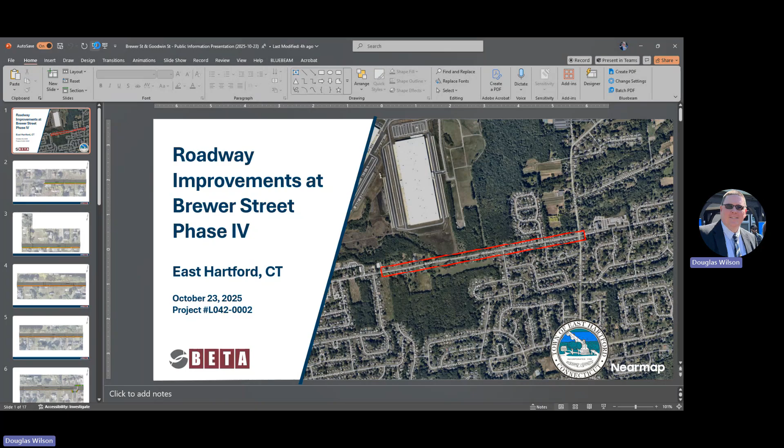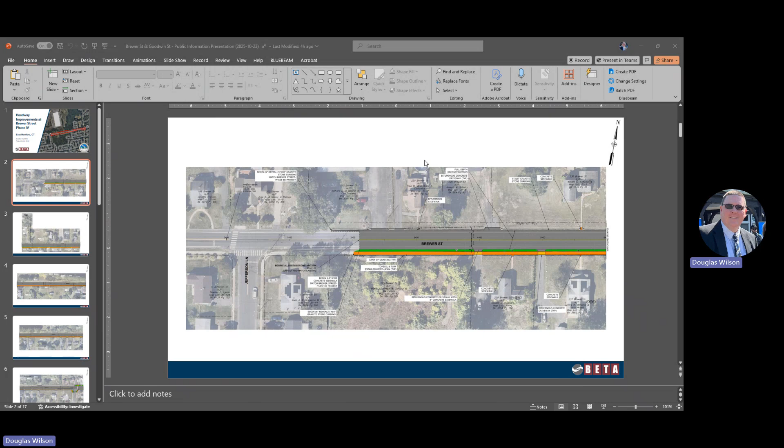This way. Let him. You just tell me when you want me to advance here. I'm sharing. See where it says stop sharing? Yeah, I must have the wrong window. Hang on, try it again. You just come over. I gotta share it as a meeting. I just have to minimize your team's talk. Okay, try that. One, I'm just gonna get here no matter what. That's cool. All right, sorry about that. There we go.

Okay, all right, perfect. All right, so how we're going to do this is that we're going to go through each project one at a time. We're going to start with the improvements on Brewer Street Phase 4. We'll take a break or a pause right after this just to answer questions and comments from everybody. Once we get through Brewer Street, then we're going to the following project, which is Goodwin Street.

So this presentation is slightly different than the material that you might have seen online. The plans that were uploaded online, those were design plans. They're not meant for a meeting like this. So what we had done for this is that we have added aerial images as well as colorizations to the maps to make it a little bit easier to read, just to follow along as I go through the project.

So again, we're going to start with Brewer Street Phase 4. Doug had already alluded to where the project is. This is Phase 4. This is the last phase of a 4-phase project. So again, this is from Jefferson Lane all the way to Forbes Street. It's roughly 4,300 linear feet.

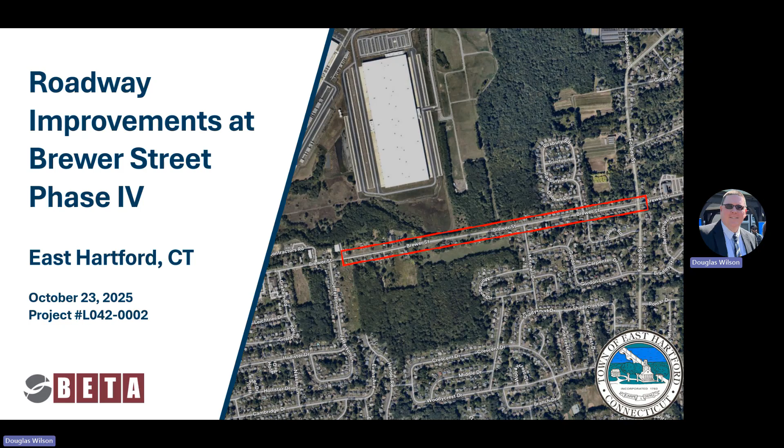So from here, what I'm going to do is show a blow up of several sections of Brewer Street, talk about some of those components in a little bit further detail. And then we can save the questions to the end, and I can always go back to a particular property or a plan for some additional questions. So starting out on Jefferson Lane.

So where we're showing the dark shaded line, that is pretty much where phase 3 had ended. It's approximately 150 feet east of Jefferson Lane. It's pretty much the cross section is exactly the same as the other 3 phases. This is, it's a roadway, curb to curb is approximately 30 feet. We have 11-foot travel lanes in each direction with 4-foot shoulders.

The only difference on this is that the curbing, if you go out there today, it's all bituminous curbing. That curbing is going to be changed, so it's going to be actually granite curb from this point all the way down to Forbes Street. And at the beginning of the project, the sidewalk on the south side will be picked up. It's a 5-foot wide concrete sidewalk. Like I said, it's from Jefferson Lane all the way down to Forbes Street.

You'll notice that at each of the properties, we will be reconstructing the driveway aprons, as well as continuing the sidewalk across those driveway aprons. There may be some properties where we might have to reconstruct a little bit of a concrete sidewalk. Maybe it's a pathway up to the front door. Maybe it's a little bit of the back of the aprons on each of the properties, but it's going to be very, very minor.

So onto the next section. This is basically a continuation of what I had just shown you. This is the section, the cross section is pretty similar.

By the way, the roadway, when it's being reconstructed, it's actually a full depth reconstruction. This is not a mill and overlay operation where we're just taking off the HMA. This is a full excavation, all new base material. I believe they're putting back 8 inches of asphalt, so it's a pretty beefy section here.

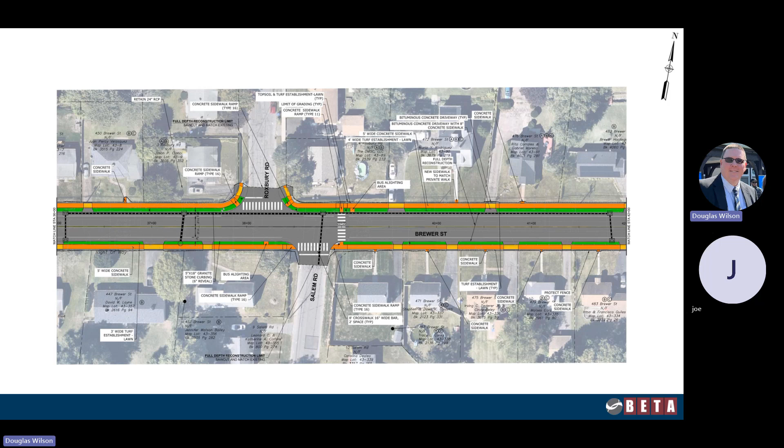Is there any coordination with that project on Handle Road, Jefferson and Brewer, to not do the sidewalk if they're gonna open this up? Is there gonna be a driveway or a street potentially in the next couple of years that wouldn't need a sidewalk in that spot if they open that up to traffic with houses in the back?

The section where the developer is looking at a subdivision for residential housing is this piece right here, to the east of 6 Jefferson and before 229. It's the grassy, shrubby piece, at 215 Brewer Street. So you have Jefferson that comes out, one house, and then the developer's house. Their original ask was to push the road through right there and have two houses away, another road that came out.

One of my roles is legal traffic authority, and I said no, I don't want another road coming out just two houses away. It's too close — so close that when you come out of one, somebody could be coming out of the other and you'd almost be staring at each other. It's almost like they'd need to join into one intersection. So they're not going to do any road connection from that developer's parcel onto Brewer Street.

They're going to do a public sidewalk connection instead. So if you're down in the subdivision, below it, you come up through their road — a public road — and walk up their sidewalk, coming right out onto Brewer Street, onto these sidewalks, and you can go either direction. It makes a sidewalk system without having to go over to Jefferson and come up.

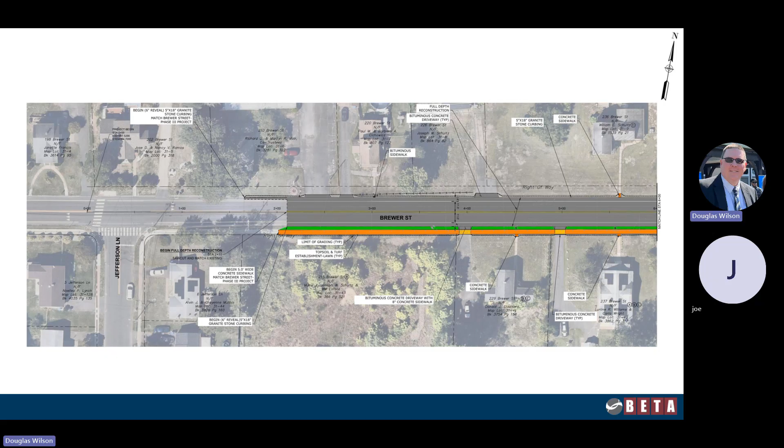It says that you're gonna put bus alighting areas for people at the bus stops. I thought you're gonna put like a pad so that people can be standing on something.

So those are called alighting areas. When we're doing the sidewalk reconstruction with all the new ADA ramps at each intersection, one thing we noticed is that typically at a bus stop you need a way for people in wheelchairs or with other disabilities to board the buses. Right now it's very difficult because you just have a grass strip that separates the sidewalk - that was one thing that did get neglected on the plan.

I don't want that - even if a wheelchair came, they couldn't get up on the curb. Are you saying, to be clear, you have a stop right near you? Yes, and it's on the north side, right next to that right of way that you need.

Part of me is wondering - is it a lot of use on the westbound side, people trying to stand on the side of the road? Then that might be an area where we want to add a crosswalk. We can do a mid-block crosswalk and put a pad there for the bus pickup, so people can stand on that.

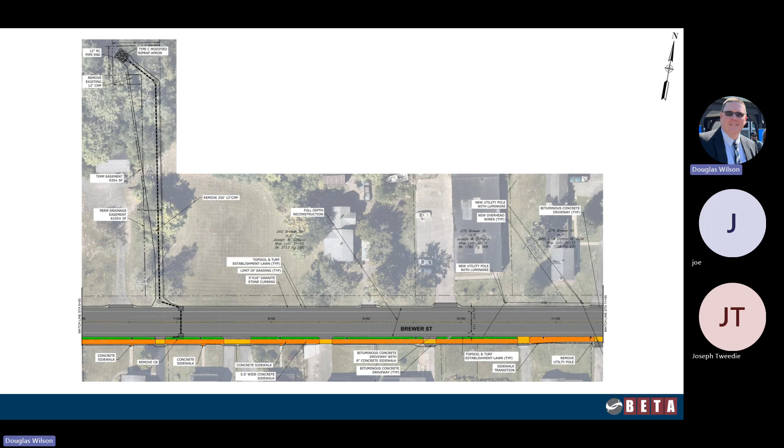Do you want to give any background to this before I start? I'll just say that I know School Street was reconstructed in 2010. This section of Goodwin Street has needed reconstruction for a very long time - it was done in '80. The cross section is just absolutely hammered, in front of my house anyway.

To be honest, what I did when I submitted the application is I put a level on the road and you can see the dips in the road, right from my house. It's really bad.

The design of the street will be with a very heavy base and a very thick pavement that will be able to take the industrial traffic that comes from Leggett Street, from the distributor, and from Sherwin-Williams, right with the Duraplex - that's what it is, just right after the Duraplex, on the main street.

So the brand new section is absolutely mandated here, like trying to mill and pave that road to make it better is not going to do a thing. Because that's only got about 8 inches on it, and with the tractor trailers and stuff, you gotta have a minimum of 12 or better. I think Jason probably knows the exact number, he'll give it to you in a minute.

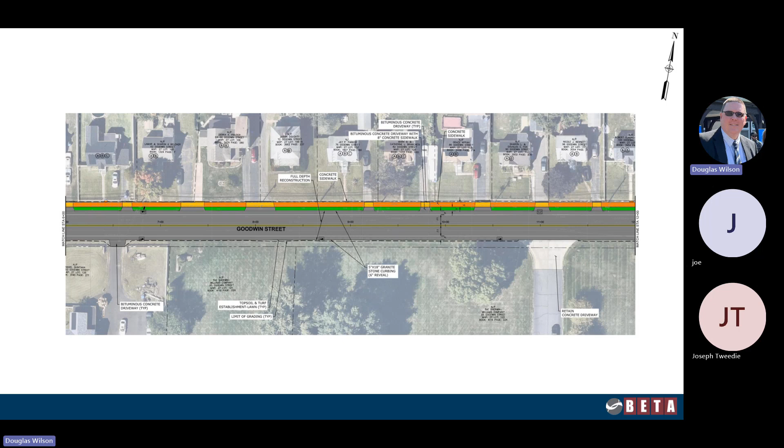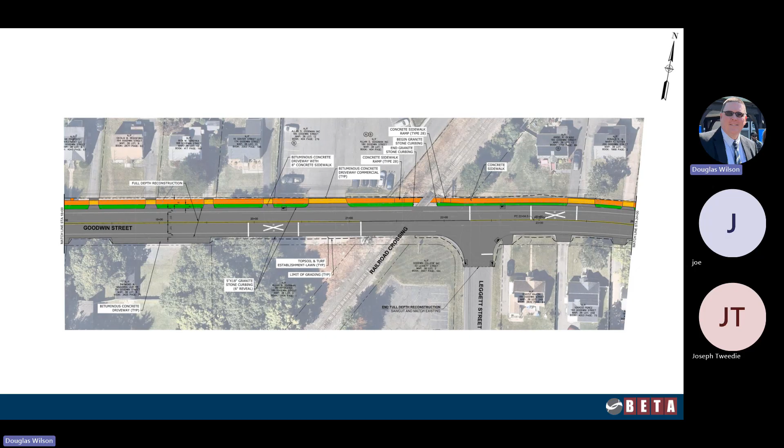All right, what else you got there? I'm gonna skip this, we already talked about this. Let's talk about this—we mentioned the railroad crossing. We mentioned that it was going to be either upgraded or rebuilt as part of a couple of locations, but as part of this project, we are not directly impacting the railroad crossing. So the rubber mats that are out there are not going to be touched—we're going to just basically build right up to that rubber mat.

We will be upgrading the sidewalk ramps on the north side, each side—those will both be ADA compliant. Right now they're not. So it's going to be 5-foot wide sidewalks with ADA compliant ramps. We're going to have appropriate markings and restripe it just as it is today—11-foot travel lanes, 4-foot shoulders, nothing too special here.

And it really doesn't change much from here on out. It's a consistent roadway section, same sidewalk, same grass strip. We do introduce one drainage structure in the middle of the plan just to handle some of the stormwater a little bit better, but other than that, there's not a lot of other drainage improvements.

And we are going to be adding a crosswalk at the condo association—is it Joanne Drive? Yes, we will be putting in a sidewalk ramp with a crosswalk so those folks can cross to the other side of Goodwin Street at that location. And then we pretty much terminate that just short of School Street on the right-hand side, matching the end of the construction that was recently done a couple of years ago.

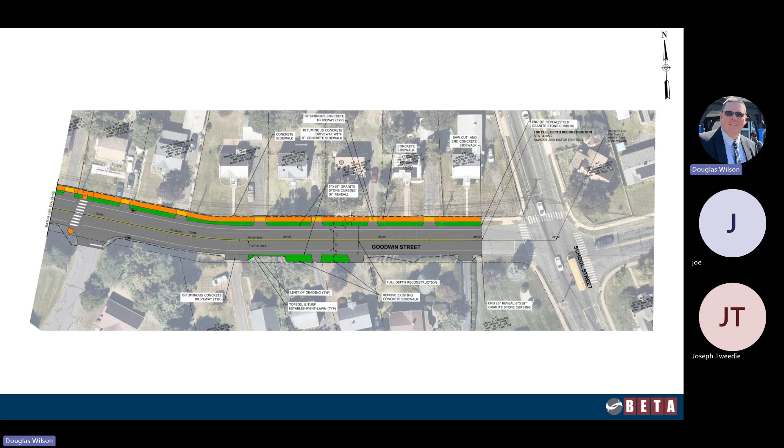I travel down that road all the time, and count me as one of the people that's 100% in favor of the project because I know it's like a war zone. I'm probably one of the guilty ones that's been driving on the left side.

I appreciate everything. My question is, early on, Doug, you had said that the thrust of the project construction is going to be paid for by the state. Correct, except for the Beta Group, which is, we pay for the design up front. Do we know what those cost figures are at this point? For Beta, I don't recall where your contract was.

Because the onus is on the taxpayers for that, right? Correct, yeah, I'd have to look it up, or guesstimate. Yeah, it's in the couple hundred thousand dollar range, something like that. So it's a couple hundred thousand between friends. On a $3.5 million job, it's actually pretty reasonable. Yeah, it's a drop in the bucket.

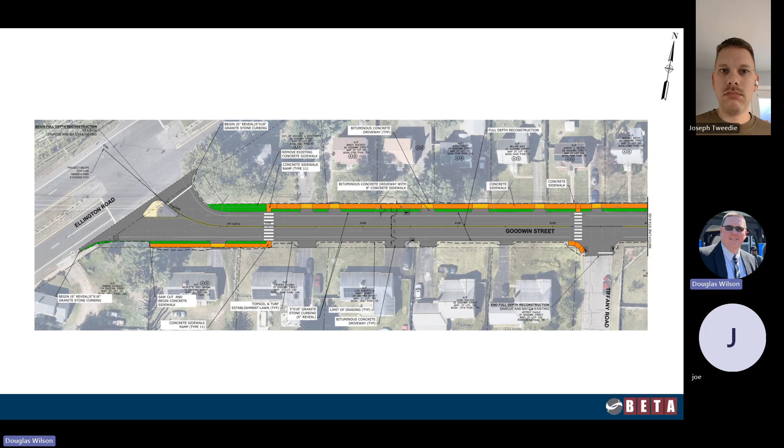So there's that, where the guide rail is on the north. It's past Jefferson, halfway past that corner road where it's all overgrown now. Pratt's supposed to take care of that, but it's all overgrown. There's a metal fence besides it.

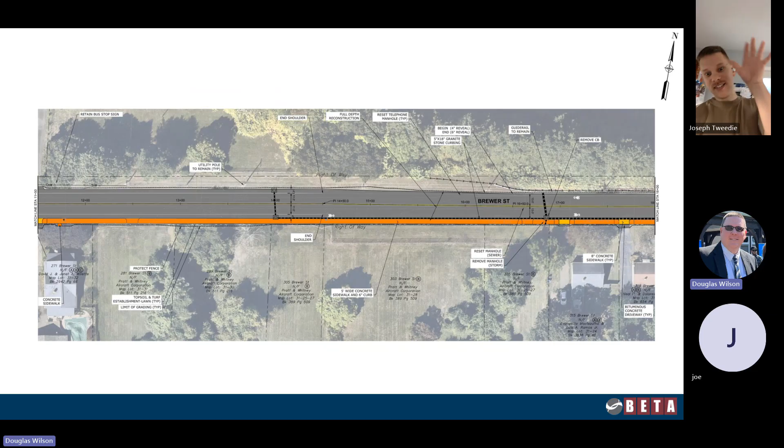So that's the driveway that goes in. Go one sheet west. This is the driveway that goes in, and there's a big culvert right here. Talk about that, it's right over Brewer Street. You can see it when you're on Brewer, across the road from Jefferson. It's all overgrown now, you can even notice.

Okay, across the road from Jefferson, well, and then you go down, take a right, and where they don't have any houses there, it's just all overgrown. There's a fence there beyond that, because Pratt's supposed to take care of that brush so you can see the water. You can't see the water now because it's so overgrown, they haven't taken care of that in years.

We're not gonna be touching the brook at all, not at all, and definitely not on Whitney property. This is our right-of-way line right there, that's as far as we go. Anything beyond that is all private.

Now, they don't necessarily need to clear the brush out on the brook. They can leave it. If it's causing backup and flows into areas that they don't want it to, then maybe they would go cut it, but they don't have to take it out. But it is right near the road, it's not deep, it's almost...

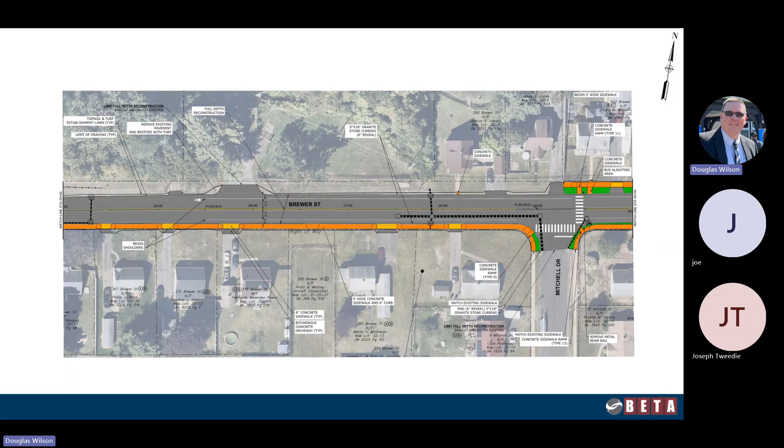The guardrail is there and then the water's there. Yeah, that's what I was talking about with the guardrail. So the guide rail starts here and kicks in, and the brook is right here. We are absolutely not touching that, we're not touching the guide rail, so we don't want to mess around with that.

If we tried to go and clean that out and do anything to it, it's a very big permitting process to try to straighten it out or clean it out. But there is floodplain all in here, floodplain all inside of Pratt. So if that was to overflow, it's really going to flow out in that direction. This is higher, the road's higher than the brook there, so that height is going to take the water way out in Pratt instead of on the road.